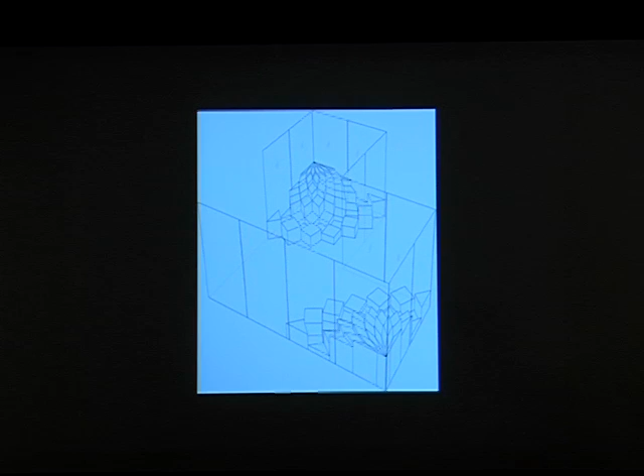We thought that an interesting way to do that would be to work in a radial pattern, because obviously that focuses on each individual piece. So within the setting that we were given, that odd L shape, we realized immediately that we'd have to do something to capture space beyond what we were given because it was kind of a disappointing footprint. So we immediately moved to mirroring and working with the radial pattern that we came up with to create virtual spaces.

And so by mirroring all the walls and bringing the pattern from the floor and creating a landscape surface, we were able to capture, virtually, miles and miles. And you can see that it created kind of a lounge space which sort of straddled the gray area between furniture and landscape. Funny picture.

This next project was never built, and it was a proposal we had for the largest tower in the world. It was a radio tower that was to replace the radio antennas lost at the World Trade Center. We were actually brought in by an engineer who was approached by a developer, so it was an interesting relationship.

It immediately became apparent that when you're building at that scale, engineering and structural concerns really drive what needs to happen. We found it an interesting challenge to create a geometry that would be pure and behave in a very pure and efficient fashion, but offer something unusual, and we came up with a tripod structure that was repeating vertically and then stacked.

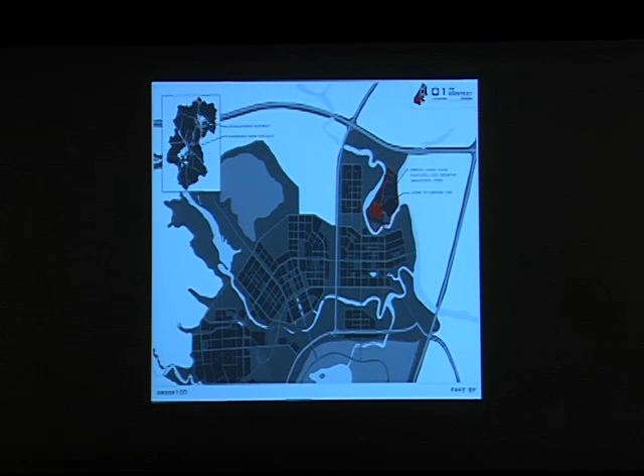So the next project we're going to talk about is Ordos 100. Herzog and de Meuron and Ai Weiwei and his company, Fake Design, invited 100 architects from around the world to each design one villa in Inner Mongolia. This is the new city of Ordos, and the site is just outside of the city—it's luxury housing on the river and reservoir there.

There's very little existing context—it was just really a desert. So in that sense, it was a very difficult challenge for us because we rely so much on context, and here the context is sort of an unknown.

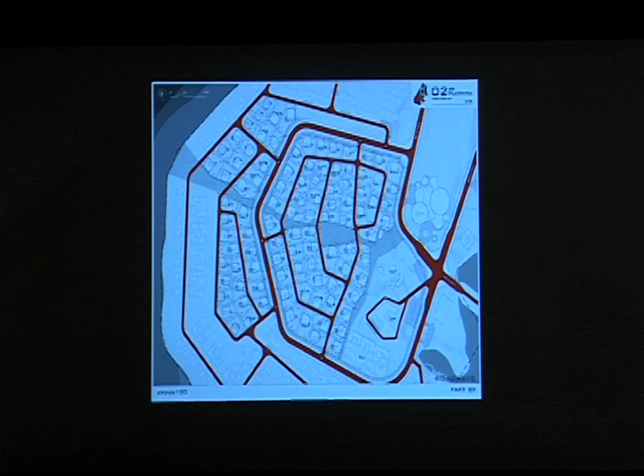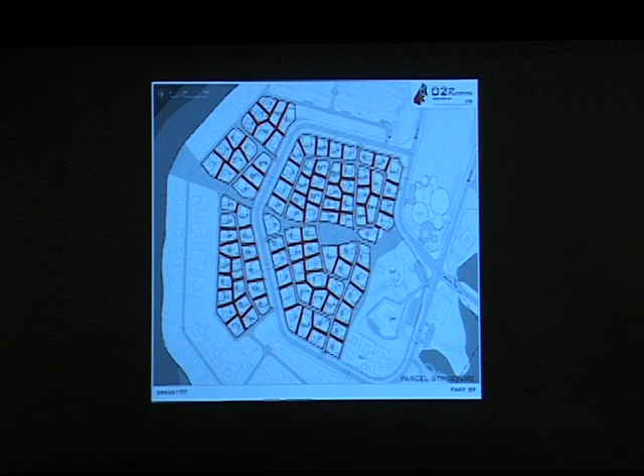We thought that was a very compelling and unusual context in which to build a house, particularly since this is our house—particularly since often housing is about creating a private sanctuary, not about being on display. So we accepted all of the contextual constraints we were given.

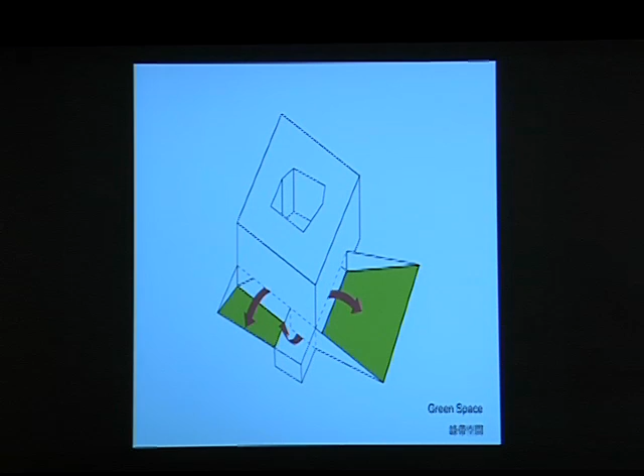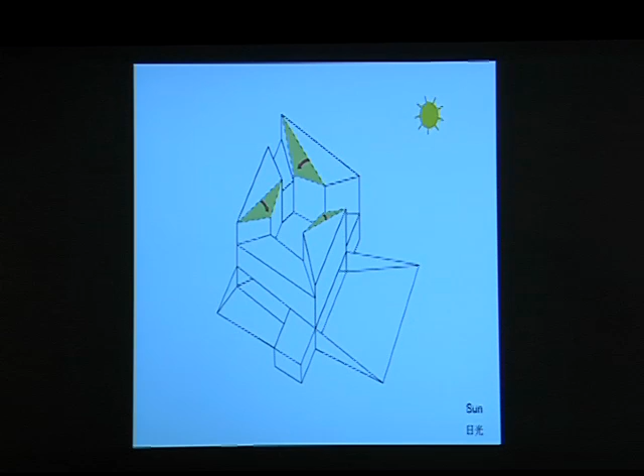We took the given volume, created a sunken courtyard in the middle, pushing the ground floor down into the ground, then cutting the landscape to provide access and direct continuation of the ground plane into the space. We also cut the top layer of the building to create views and allow sun into the courtyard. That's what generated the massing.

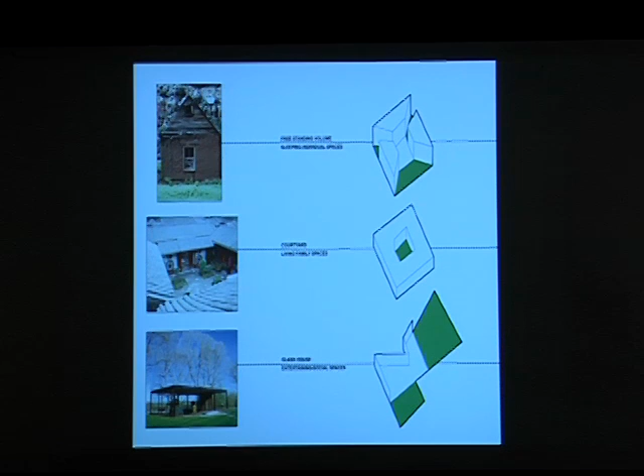The structure of each floor had quite a different character. The top, because it had been separated, created 3 pavilions with green space between them. In the middle was the courtyard, very traditional Chinese type, which we used for the main living space. On the ground floor, which had been sunk and exposed to the ground plane, you created more of a modernist building as an extension of the landscape. We thought it was interesting how you could create these 3 types stacked on top of each other.

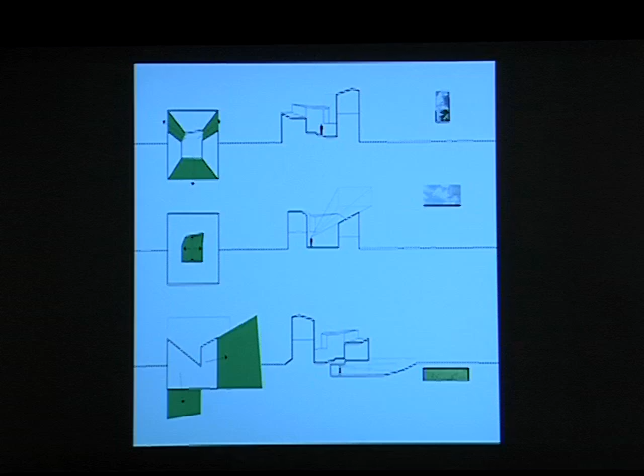The other thing we thought was important was to deal with this need for privacy in a residential space, while acknowledging that this is really a showy architectural object that is going to be viewed in the round. So we looked at strategies for landscape in the 3 zones—the public spaces, the views open out to the public, are the ones buried into the ground a little bit, so the mass of the house is pretty private in terms of views from the street.

We are always interested in this idea of view and perception, and how the object is understood as you move through space. Typically we try to create a dynamic, changing condition that has to do with scale and point of view as well.

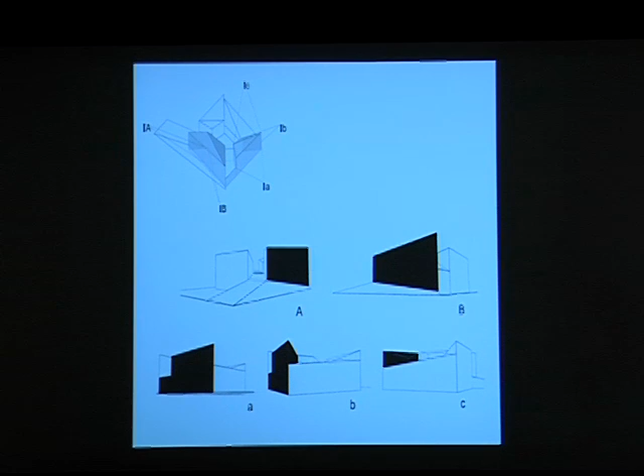In this case, the shape of the building is sort of parallelograms—none of the elevations on any side are even. So from different points of view, perspectively, it takes on very different massing or dimensional quality. A plane might look planar in one view and volumetric in another; it may take on a completely different shape from another view. This was dealing with the idea of an object viewed in the round. So this is what you see as you walk around the house.

The other given constraint—Ai Weiwei suggested that we use brick. It's the most abundantly available, inexpensive material in the area. What we thought was particularly compelling about brick in the context of China is that labor is so inexpensive there.

So the strategy is very simple. We took the brick and allowed it to take the geometry of the massing we'd already established, so that at each point a course of brick lines up with a corresponding cut in the elevation. Then you simply stack that, and because the conditions are different on every side, you end up getting multiple conditions on each face of the building through a very simple device.

This is the elevation. We also created some openings, some more diaphanous zones in the brick pattern, by opening it up a little to let light in. The overall strategy just takes the geometry from the building and carries it through, creating a series of different patterns on every elevation in a very mechanical, dumb way—but it leads to tremendous variety.

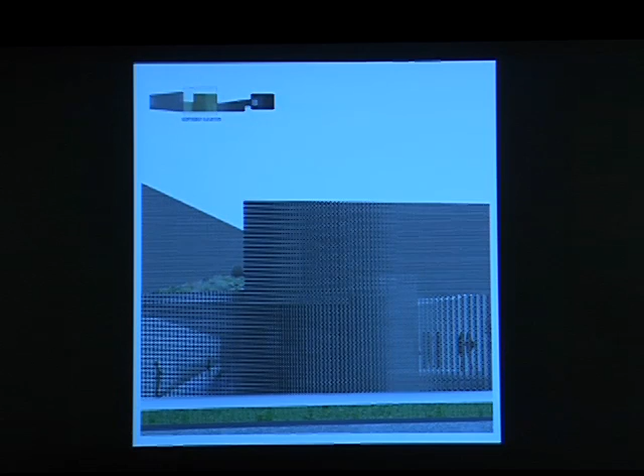This is sort of the main street view. It's the most private in a way. There's just a little bit of an acknowledgement of an interior volume on the ground floor. This is one of the spaces that goes down into the public space in the recess there. That's Ai Weiwei coming out—he likes our house.

And this is the view from the street, so you can see it is quite private. It is kind of this sculptural object.

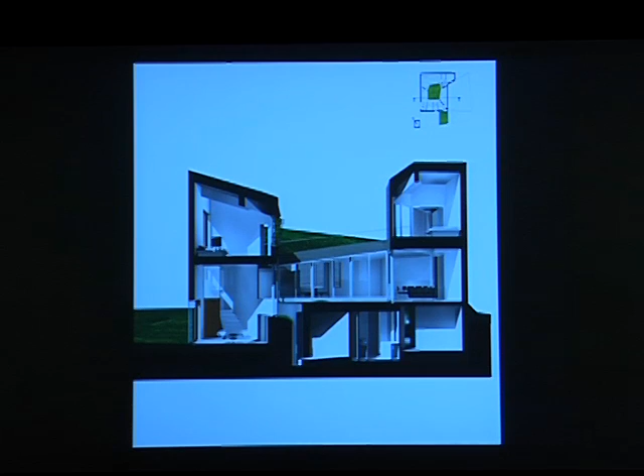In addition, because of the conditions—well, globally, but also in China—we wanted to take advantage of this kind of massing we have and the open space in the middle to really allow the center of the house to organize itself around that courtyard as a kind of landscape.

And then we also took advantage of these kind of window boxes where we planted plants between the brick screen and the interior, so that in the summer they would block the light and in the winter they would allow light in passively. Part of the program was also a swimming pool.

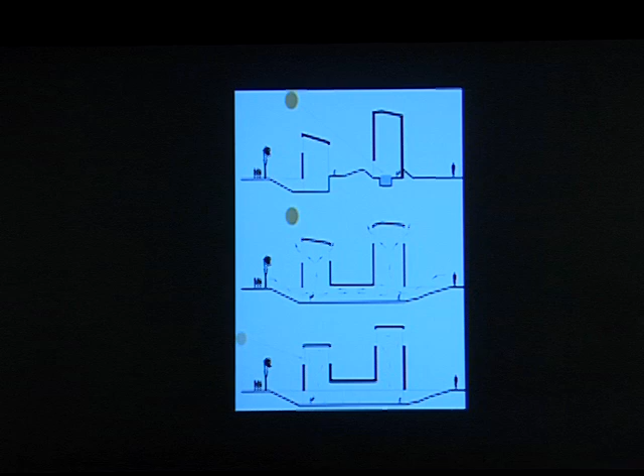We included the pool on the terrace level and took advantage of that so that again it increases the stack effect. It has a natural tendency to cool the air that's coming in, and then we have stacks at the tops of the taller volumes to let the air out.

This is just a view of the changing quality of the facade throughout the day.

Our next project is also a residential project, a little closer to home. This is in Pennsylvania, near the Delaware River. It's a really beautiful 60-acre piece of land that sits on a field adjacent to a ravine, which is very densely wooded.

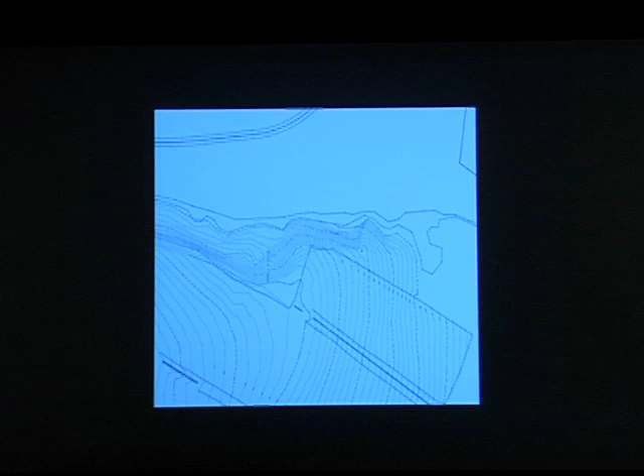So we chose the location right at the edge of that boundary condition between the field condition and the much more densely wooded ravine. We thought that was the place that had the most variety in experience, the most varied experience.

So the house is organized so that it faces each of those four conditions, so that in any particular location within the house you have a very different kind of context outside as you look out. So it's really about the views out.

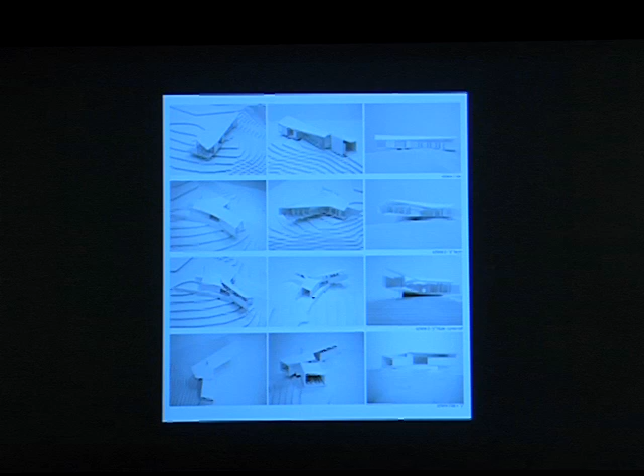And given that starting point, we looked at several ways of massing the building to exploit that kind of condition that we decided to develop. We also looked at sun studies as well. So the final massing was very simple, kind of a double bar.

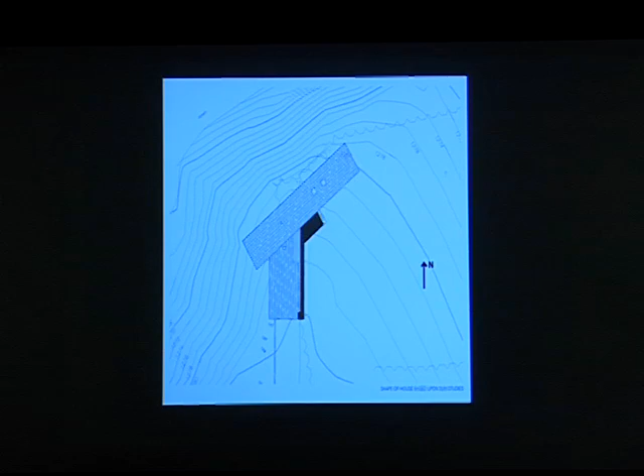The main housing bar follows the ravine and the wooded lot. Because the site is very—we wanted to really emphasize the quality of the site—one of the things that we did is we started carving out some parts of the site. We wanted to reuse the existing stone that's very common to the area.

So we kind of created a stone base, partially dug into the site and partially built up from the site. And then that wall gets extended to connect to a series of existing stone walls on the site.

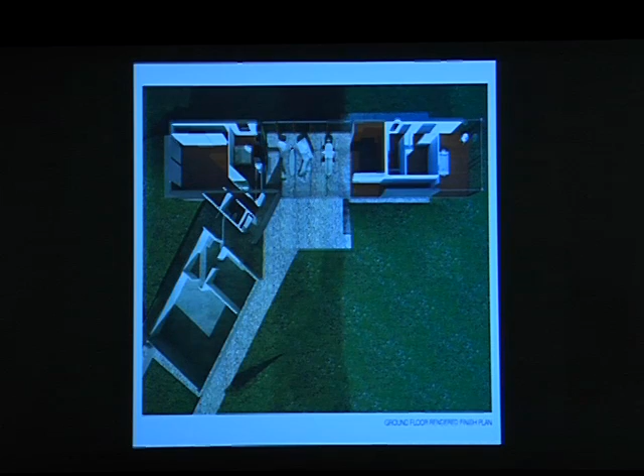And then the housing bar is really a kind of simple light frame structure that sits on top of that base. The plan is very simple: the garage is on the left, and then you have a couple of bedrooms on the two ends of the house, and the main central section is the living area.

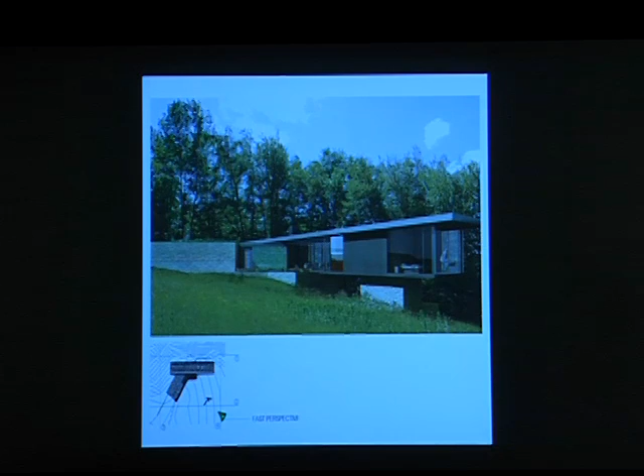The house sort of floats on top of that stone plinth so that the landscape kind of cascades beneath it. And the house also, because it's tucked away, has a minimal visual presence on the site, but you have these very dramatic views from each end of the house.

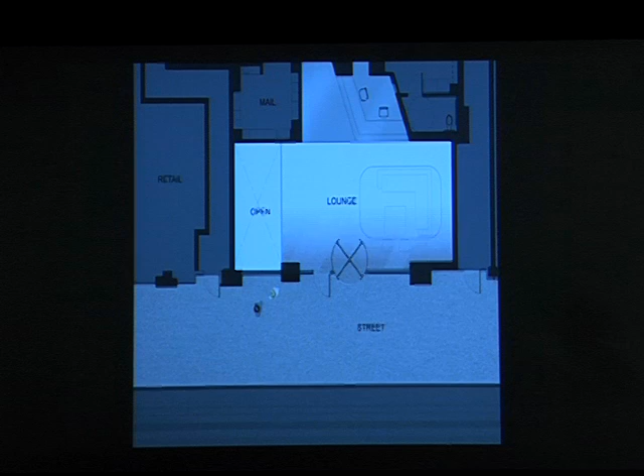This next project is in downtown Manhattan, for the public spaces of a condominium building. It has an interesting relationship with the previous project in that, whereas the previous project was focusing your view out, in this we were working very hard to bring the street and the activity in. We felt people are really moving to that neighborhood just for that neighborhood, so we wanted the public areas to feel almost like a club, like part of the street scene to the extent that we could.

The other thing we felt was very important was to bring natural light into the amenity space. They had proposed an amenity space below grade, so the first thing we did on the project was request to move it up so it was aligning with the windows. You can see there's the open space, which they very graciously agreed to.

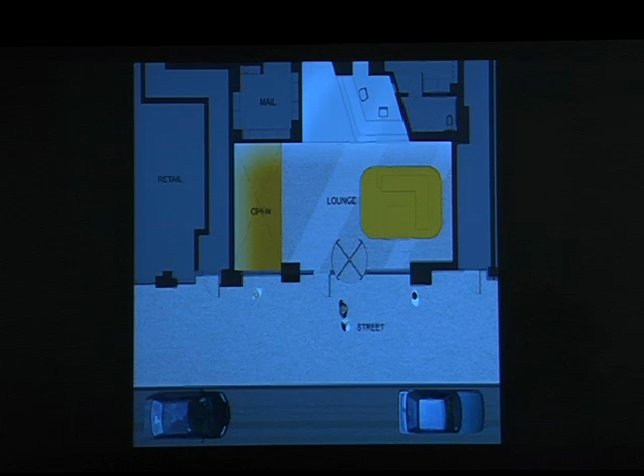Through the use of materials, we visually bring the sidewalk streetscape in and create another threshold, which is pushed back. At the uppermost part of the plan, that's where the concierge would be. We used a recycled glass terrazzo, which looks like the sidewalk—you might need to squint a little bit, but that's okay. The concierge part, mailboxes and everything would be in the back, which would feel like the part where residents would go beyond.

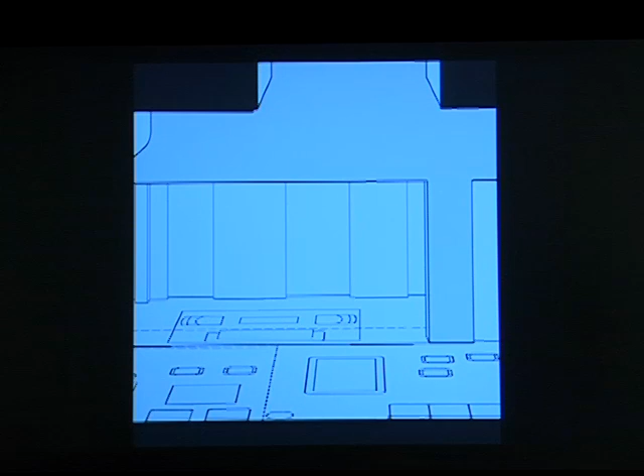But if you were sitting in the lobby, it could feel something like what you'd expect in a downtown Manhattan scene. All the materials, especially from that very solid back wall, have a kind of ambiguous quality—a mixture of aluminum and satin mirrored, back mirrored satin etched glass, all working together to create this strong threshold, which goes from the ground floor down into the lower amenity space, creating this configuration.

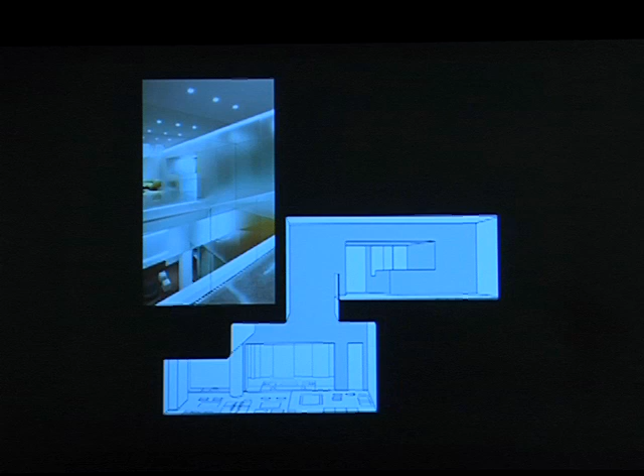That wall that was just highlighted was also mirrored, which pulls the light from the side, as you can see in this image, and doubles the space visually.

This is the view from upstairs looking down—you can look directly into the rec room that they have, which is really just for residents. The idea here was that in the daytime, when the light's coming in, you're getting natural light down in this area, and people can see down and understand what's happening in there.

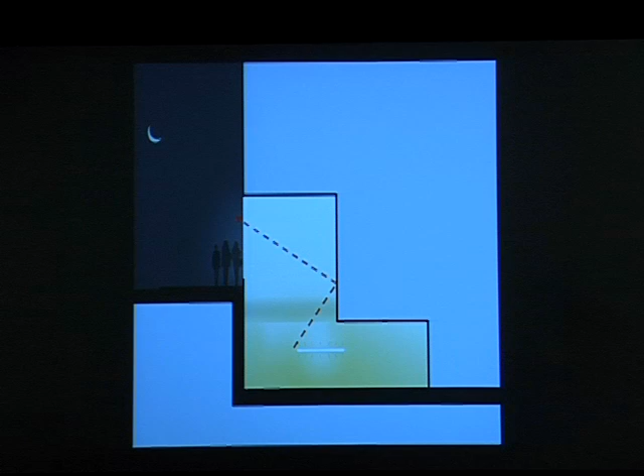But the wall is not a specular mirror, it's a diffuse reflection, so you're not actually seeing people and what's going on, but more just a sense of activity, which we felt would create sort of an intrigue from the street level. This is the view standing back and looking across.

This next project is a commercial project, and again the street life of New York was very important here—it was an important part of the context. The client was Flight Club. If you Google them, they come up as one of the top 10 cool sneaker stores in the world. Their original store was a very small storefront on Greene Street.

You kind of had to know about them to know where they were. It was not a big street, Greene Street, just off of NYU. What they were trying to do is create a new flagship store, but they didn't want to lose that kind of underground, cool vibe. They were very concerned about creating a large store on Broadway and losing their original qualities.

What we thought was really nice about the space is that it was a really beautiful open space right on Broadway. What we did is rip out as much of the facade as we could and create just a very large doorway, so you literally feel like the space is an extension of the street. The doors are these big pivoting doors, and the handle is just basketball leather and rubber, which recalls the basketball—an important component in their iconography.

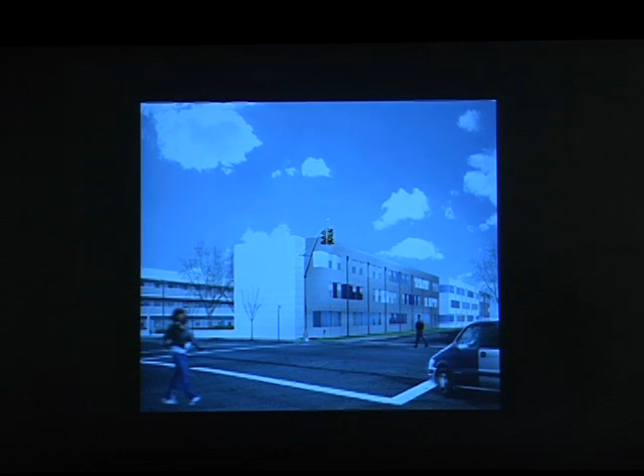And the whole thing will be reclad in metal wrapped insulated panels. As I said, the moves that we had were fairly limited, but the opportunity is enormous. So in a way, it's very close to our heart, even though it looks very simple from the outside. And we couldn't find an existing picture, but it's actually all taupe now.

So if you can imagine that, it has a very different configuration. So this will be a lot better. It's supposed to come back online at the end of the year, which is really exciting. Here's the view from the other side.

On the interior, we again used color, manipulating the door rhythm, and then really lightened up the railings. We tried to make them as light as possible so that there was more visual connection between neighbors to really create more of a community feel.

Now this next project is in...

Oh, we did get a Design Excellence Award from Michael Bloomberg in recognition of the fact that the change from what is there to what was proposed was enormous.

This next project is entirely speculative, and we entered the Electrolux kitchen design competition in 2010. The charge there is to create the kitchen of the future, and we thought that it would be an interesting challenge to work on something absolutely so small and just purely future-looking.

The requirement is to work with Electrolux appliances, which of course are the heart of the kitchen. And then the thing that was intriguing to us is that obviously the kitchen should really be all about food, and this relationship between food being processed in the kitchen and then consumed. We thought this was absolutely the crux of the whole experience there.

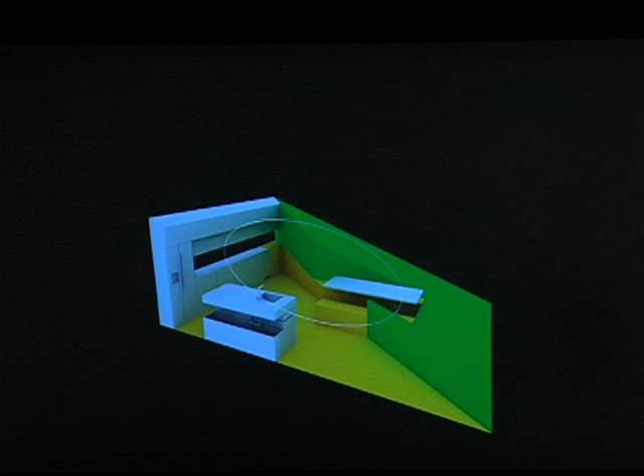But it's really only half of the cycle if you think about it, because the food is created someplace else and brought in. So we thought it would be really interesting if you could have some of the creation part and bring the whole cycle into the kitchen. So we proposed a kitchen which was kind of like grow and cook, bringing the entire experience into the house.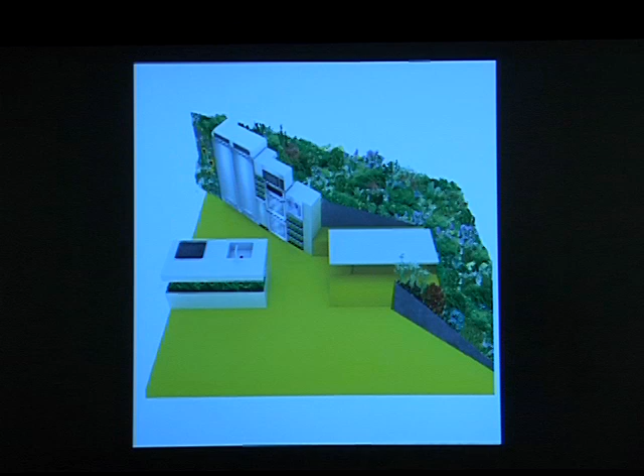So with a combination of the off-the-shelf Electrolux appliances, which were required, and agricultural pieces like grow drawers and irrigation trenches that you can see below the sink here, we created a kitchen machine, kind of, where you could produce and consume your meal in a fashionable setting, we felt, and it would round out the cycle in a way that we felt was healthy.

The other thing we did was we had ideas for using the exhaust heat from the back of the refrigerator, for example, to warm the plants or herbs that might need a different kind of environment. And the gray water from the sink would irrigate the plants that you see in the foreground here. We liked the sort of relationship with Déjeuner sur l'herbe.

It was just fun. We did win second place, which was great, and we got a whole kitchen.

Which was actually the reason that we entered, on a personal note. We were buying an apartment at the same time, so it was all a very happy confluence of events.

I can't make it go ahead. It's just slow, I think you just have to wait.

Our kitchen doesn't look anything like that, though.

So, as architects in New York, we end up doing a lot of interior renovations as well. You're looking at lofts and apartments and just trying to figure out different ways of living in these spaces, sometimes under very constrained conditions.

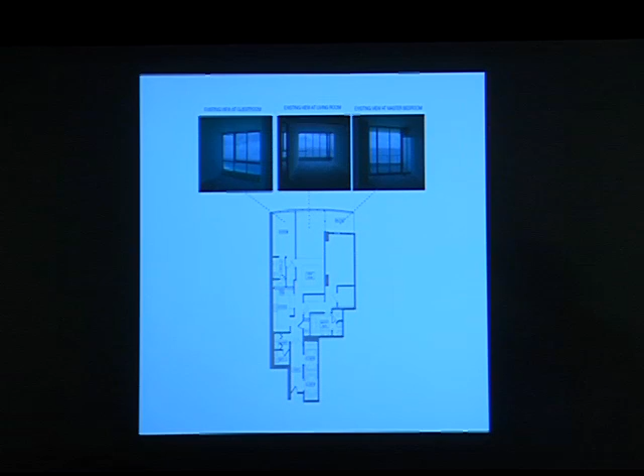This was a very wealthy client who we had done some work for, and he hired us to build out his small apartment in Miami. It overlooked the water. It was a developer apartment, sort of like 2 bedrooms and a living room. Each room had a kind of window out onto the ocean, but it felt just really what you would expect from a developer project anywhere.

So what we wanted to do was really open up the apartment so that it emphasized the fact that you were on the water, that you have this amazing view of the ocean, and that you're right on the ocean. So we reconfigured the entire space so that all of the windows are visible from all of the rooms in the apartment.

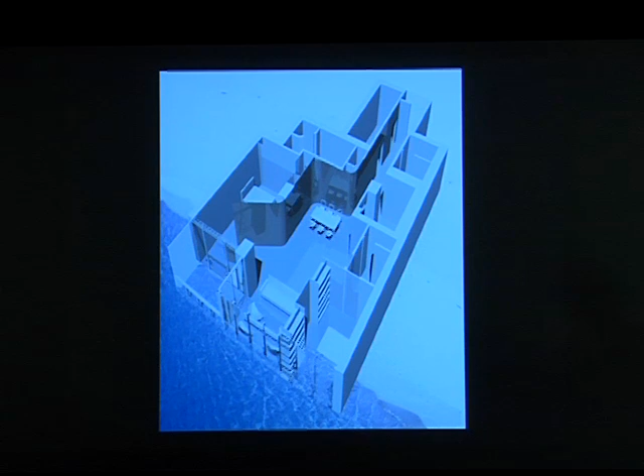The way we did that is we took the bedroom, which was originally on the left side of the space, and kind of demolished that wall, but created a moving wall which could create the bedroom when you need it, but disappear when you didn't. You can kind of see that in the 3 photos.

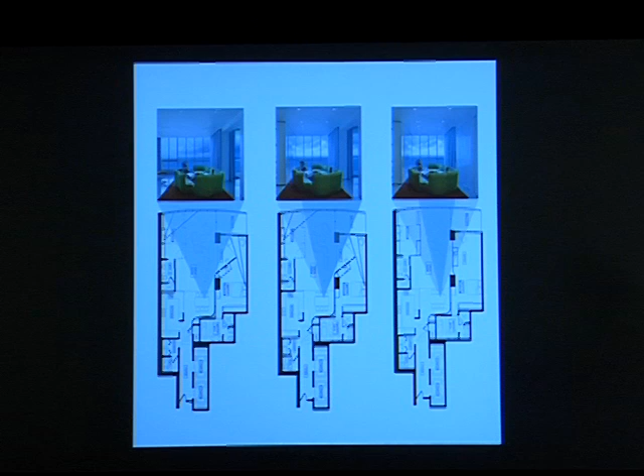And then on the right side, we moved the entrance into the master bedroom also to the window, so that when you have it open, as in the first 2 pictures, you can see those windows as well. And so this is a view of the whole apartment in the open condition.

When you need that bedroom, that unit is about a 2,000-pound unit, and it's hung from the ceiling. You can see that little crank on the end of it. You just turn that, and it kind of glides along on the ceiling. When it opens up, there's a Murphy bed that's sitting on the wall, and it plops down. The unit itself has sort of the dresser and a closet built into it, and it also has the door, which then closes against the existing bathroom volume.

So they were able to get a bedroom for their mother-in-law when they needed it, but most of the time they don't really need it.

Then on that other wall, what we did is, I mentioned before we wanted to open up the entrance to the master bedroom so that it was at the window. And really to draw people through, we treated that whole wall as a continuous ribbon from the entrance all the way out to the window. The opening at the bedroom really looks like the wall sort of extending into the room, but it can be closed off.

Part of what we got to do in this project, which we don't always get to do, is design the furniture. So this is the bed that we designed and a table that we designed. And for both of these, we used Rhino to model it, and we had it custom fabricated.

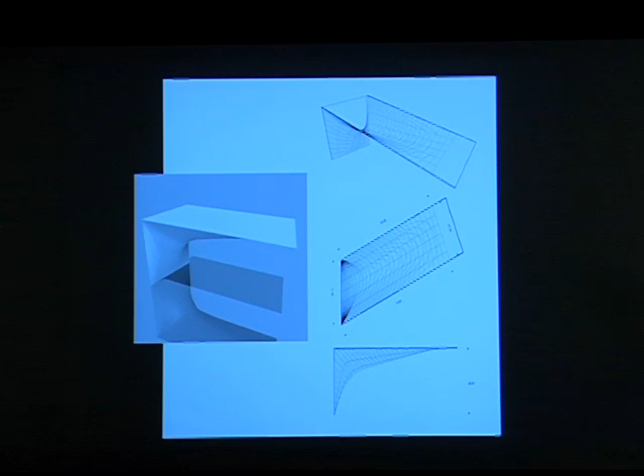The table was made out of foam and fiberglass, so it's also referred to as surfboard technology. Dan is a surfer. It's on the beach. It seemed kind of appropriate to do that.

To sort of further accentuate this idea that the interior of the space is continuous with the ocean, the floor has this kind of sandy blue resin, which is a continuous surface, and it's reflective. So when you're looking out from the back of the space, it almost looks like it's just water and extends out into the ocean, because it's high up enough that you don't actually see the beach. So you see the floor and then the ocean, and depending on the light, it can be really dramatic.

The Coney Island Aquarium, or the New York Aquarium on Coney Island, is an existing aquarium. It is on the boardwalk, but there's no opening that would let you see the ocean or the boardwalk or the beach when you're inside the aquarium, which we thought was kind of a travesty. The existing interaction between the boardwalk and the aquarium is this decorative concrete wall.

We didn't want the new building to be a sort of object. We wanted it to be much more sponge-like so that it could interact with the boardwalk, and we wanted the structure itself to be like a reef, so that you have different ecologies within the building and on either side, but they're allowed to flow in between each other and have a dialogue while still maintaining different kinds of conditions on the interior and exterior.

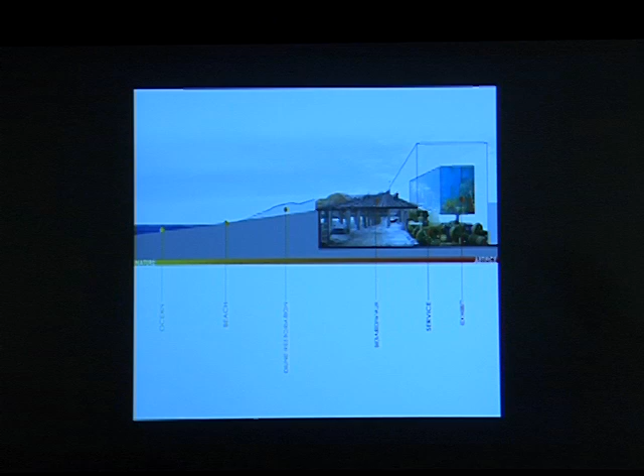It also played with this idea of artifice and nature. An observation we had is that when you're there, the ocean is possibly the most natural condition we have on the planet. Then you go to the beach, which is actually a restored beach, it wasn't originally a beach. Then you go to the boardwalk, which is clearly a man-made intervention. And then you have the exhibit, which replicates that natural condition but in a highly artificial way. It's this little ecosystem floating in a man-made box sustained by machinery.

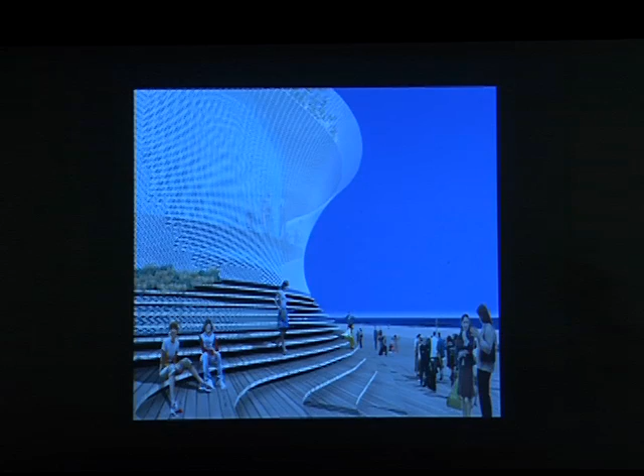So in order to emphasize that natural condition, we treated the boardwalk as a kind of landscape that went from dune to boardwalk to artificial dune onto the building, creating a space and topography that you could occupy.

Part of the charge from the Economic Development Corporation is that this building become an iconic element at the end of the boardwalk, with the parachute jump on the other end. So the idea is that the boardwalk ends down here, and people would come down, sit on the boardwalk, watch performers ideally, people traveling down, and then head back up toward the other side.

In Delirious New York, Rem Koolhaas speculated that the Coney Island amusement parks were sort of speculations on the city, kind of fantasy versions of New York City, or the potentiality of the city. And we thought that our little intervention could be a fantasy beach in a way, as a kind of counterpoint to that.

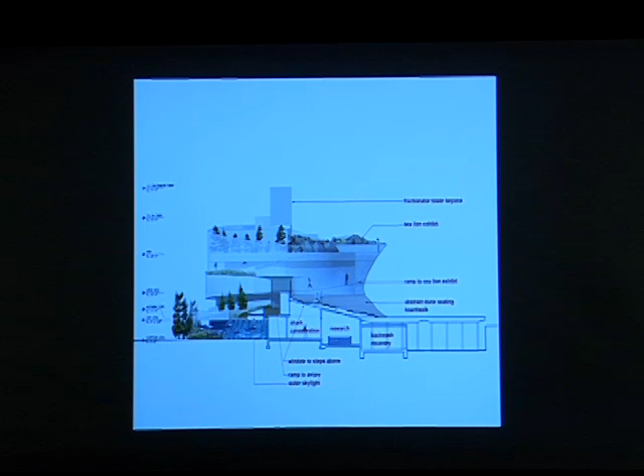Viewed aerially, it's a disruption or a melting of the boardwalk condition on both sides. And in section, the aquarium is down below the boardwalk, but it creates the possibility of bringing people up so they can look into the aquarium. And because we imagined that the steps would be open in some areas, you could also look through the platform out into the boardwalk.

We also had some exhibits which would come down to the boardwalk. So that oval opening you see there is actually a sea lion exhibit, which is on the roof of the building on the right, and they would have a diving tank so that you could see from the boardwalk the animals diving down into the space.

The cafe for the aquarium was also located on the right side, and you could have this interaction between the boardwalk and the cafe. We also proposed that maybe they could even service the boardwalk, and we got a little pushback from the aquarium on that, but we thought that kind of interaction would be appropriate.

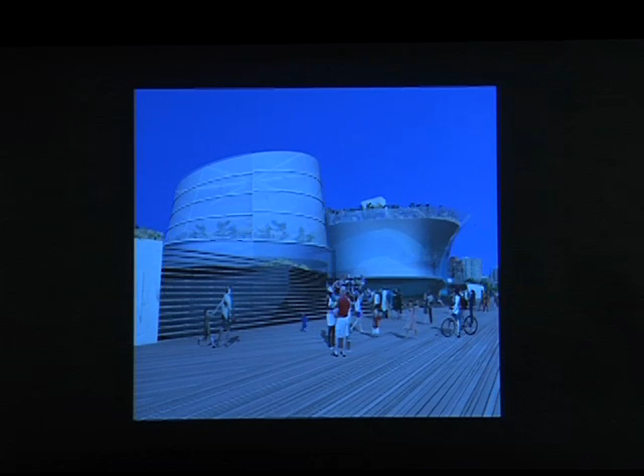In the skin, what we tried to do is use a sort of mesh, and the idea was that it had this volumetric, sculptural quality, but it also allows you to see the activity behind it. Because it was a double screen mesh, you would get a kind of moire effect, almost like schooling fish, animated in a passive, natural way.

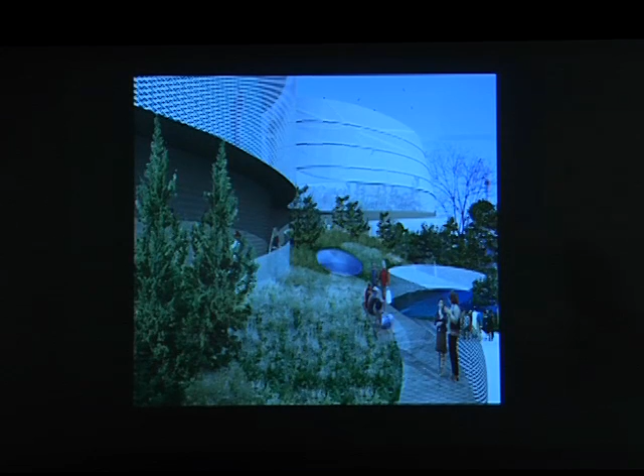The top of the main shark building also allows you to view all the way down the boardwalk. On the aquarium side, we really treated it as a landscape element. The interior of the aquarium has very little green space, it's all black pavement, literally asphalt. So what we wanted to do is take advantage of the big roof area to create a bit of green space on that side, framed by that very scripted path sequence in.

At night, and this was part of the charge for the project, this thing had to be illuminated to become a beacon at the other end of the boardwalk, in the same way that they've spent a lot of money illuminating the parachute jump at the other end. This project has gone through several iterations and is now kind of dead.

We felt there was so much more we could do, and this fortuitous environment that this closet was in is that it's surrounded on all four sides by corridor. So we immediately asked the school headmistress if it would be possible to grab the corridor, and then we set our sights a little higher and actually asked about the staff room. The teachers and the headmistress were delighted, they wanted to do anything they could.

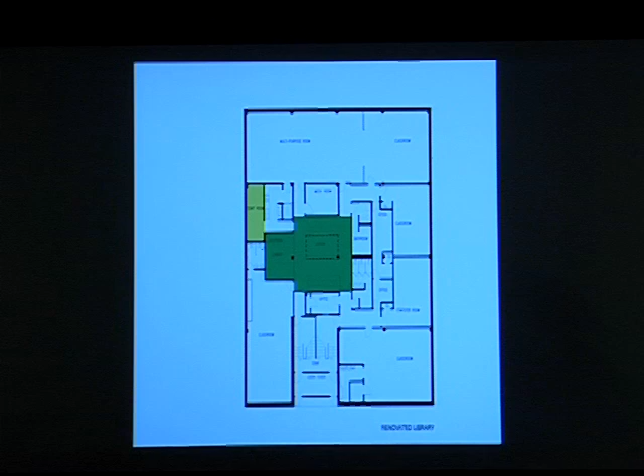So instead of giving them a library, we created like a library hub. We incorporated the entire area into being a reading, gathering space surrounded by books, but the students are passing through there to get to all their other functions. It was very, very simple, massive use of plywood here, a little bit of raked seating.

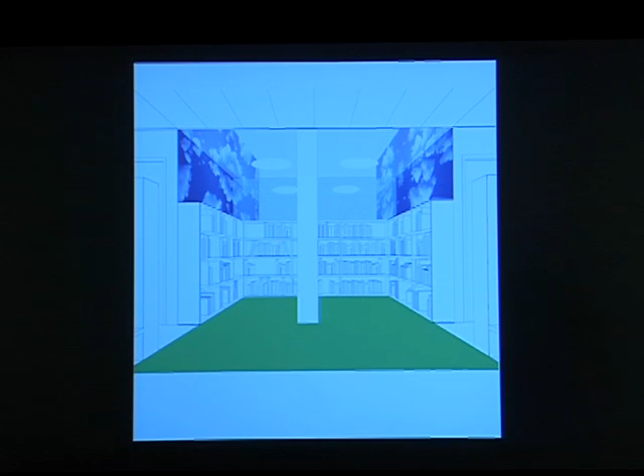The other challenge for the space is that it is entirely underground, and we wanted to do something to enliven it. So we put a mirror on the back wall, a cloud mural on the sides, and a reflective new matte ceiling across the top. So the visuals you get are much better than you might expect.

So both of those projects, you see how we're always trying to meet the program requirements, but we also, if the opportunity arises, want to give more. Obviously, that's what we're brought in for. I mean, anyone could fill in the library, I guess. But these three projects show how we have taken the program and then created either a public space or at least a community space where potentially there was none. It's sort of a byproduct of the main design, but it ends up defining the project.

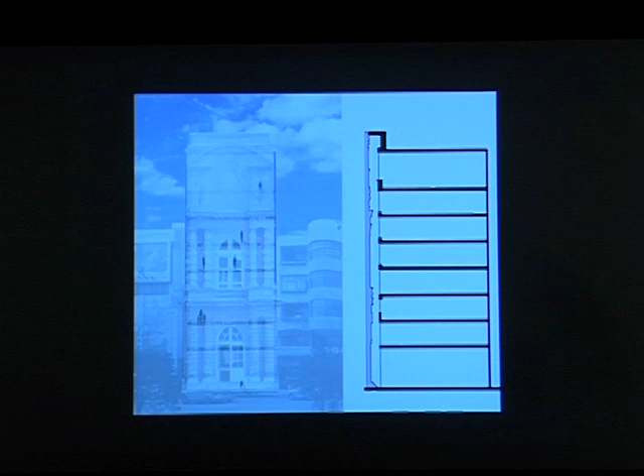When we heard about their brief, one of the first ideas we had was that we were not going to recreate, in a pastiche fashion, some French fashion house in Shanghai. We thought it might be interesting and playful to do something with a facade that had a dual nature, with an interior face and an exterior face, whereby the exterior face was straight, sleek, modern, which is also very preferential for durability, wear, and pollution in an environment that has pollution. And then the interior could be this kind of relief, and we thought cast glass might be interesting.

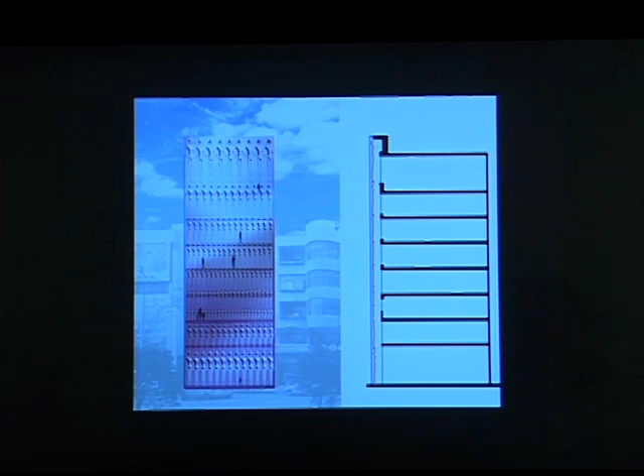We also thought this use of a two-sided facade could bring the idea of mass production into it, because obviously every Barbie doll is mass produced and comes encased in plastic, in several layers of plastic. So our first concept model, which we showed them, was this: a two-layered facade, where the interior is literally the Barbie packaging, with the exterior being a proposed storefront.

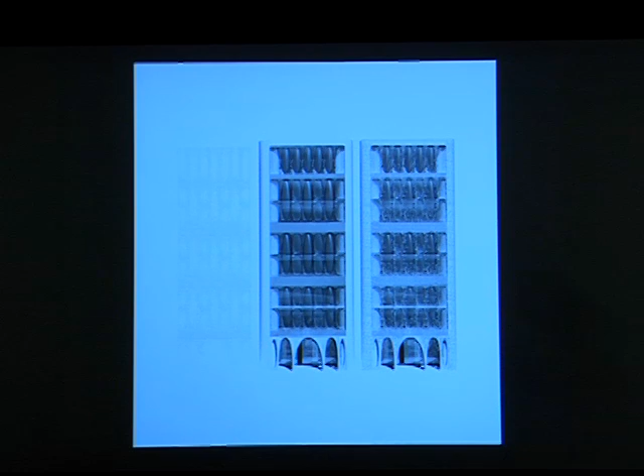It was a little too much, so we had to push it in a more architectural sense, because they thought it would be kind of freaky if you're walking by seeing giant legs formed out of molded polycarbonate—but it could have been cool. The direction we moved in was to use the two-layered polycarbonate storefront system, but make it a more architectural expression.

We also tried to make the interior spaces, the interior relief pattern, a little bit ambiguous, so that at one scale it could look like lockets or picture frames, and at another it could look like an Art Nouveau window. We collaborated with Ogilvy and Mather on the development of this frit pattern, which goes on the exterior facade. From a distance, it recalls climbing vines, and when you look close up, you can see the entire frit is made up of little brand pieces—icons like clouds, stilettos, and purses.

Because the project was in China, we had so many opportunities to do custom pieces that were very unusual. It was a very satisfying design experience—we were able to take the design all the way from the top level down to the most custom little pieces and touch points, including the dishes at the restaurant, for example.

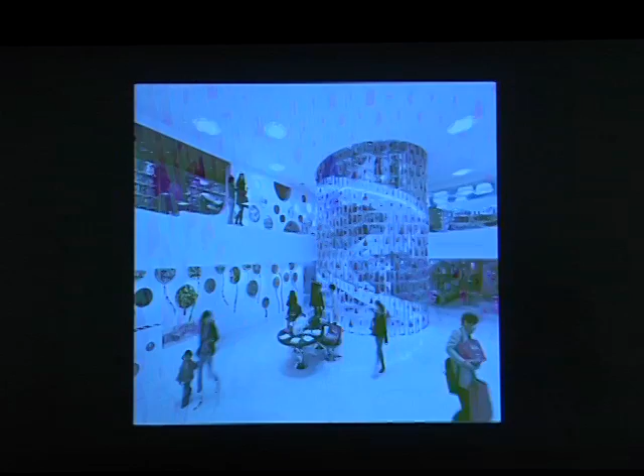This is the view as you come into the main space. It was very important to us to create different environments for the different types of products, but keep the space as open as possible. So we had the challenge of creating distinct areas that are also open.

We had the opportunity to do all of the fixtures and custom rugs, even custom tile patterns. It was an amazing experience to have this total design authorship. It wasn't—I was about to say control, but it's very difficult to control because it's all getting built in China. So there are real challenges, but we certainly had the opportunity to design everything and, as much as we could, control the manifestation of it.

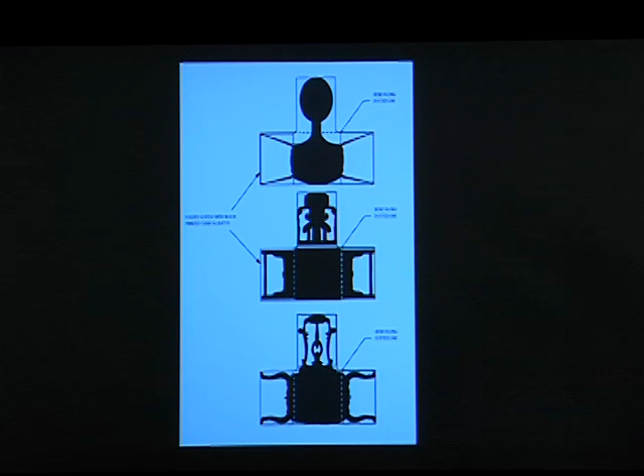We made chairs for the cafe. Again, they're folded acrylic, and here we tried to show this kind of universal appeal of Barbie with a Western antique, an Asian antique, and a contemporary chair, all printed on the acrylic and folded. We thought this was appropriate because it's this play on faux and real and mass production.

One thing we should say about those photographs is Iwan, who just finished his show here, shot 99% of those images for us. He's fantastic. When Hayes was showing you the street elevation, he said it's a very narrow street, but it looks like you've got the world. That's what Iwan can do.

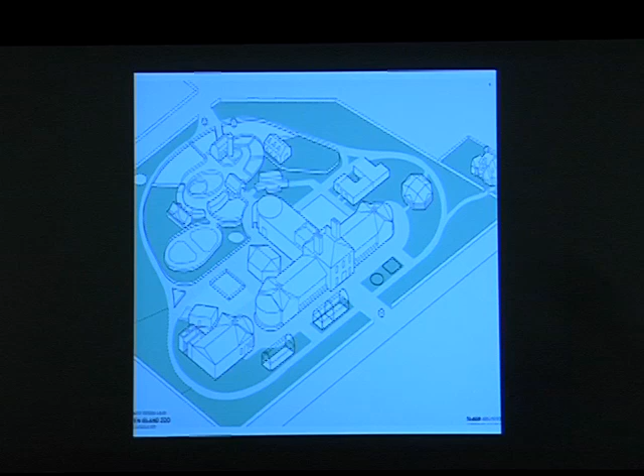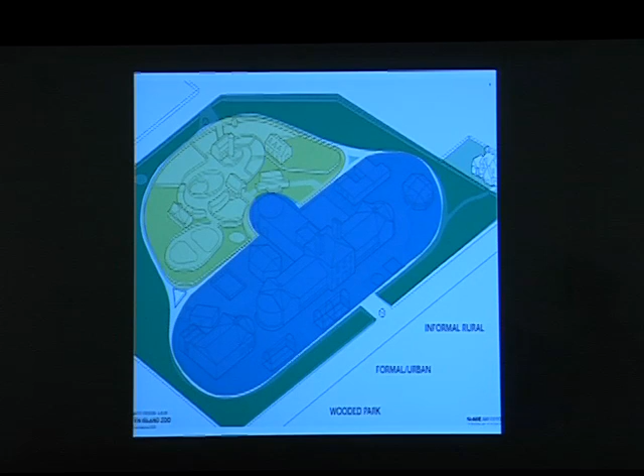This project is the last project, and it's another project for the DDC. It's a project for the Staten Island Zoo in Staten Island, located within an existing park under the New York City Parks and Recreation Department. Our charge was with the existing zoo, a very small zoo. It has a formal zoo building in front, and an informal children's zoo in the back. It's really like a front yard, backyard kind of situation. The whole site is surrounded by a really beautiful, dense park of trees, so we wanted to keep those conditions.

Now the main objective had a couple of parts. One was to create a new children's zoo. The other was to create a new entrance on this side of the zoo, because the formal side faces Broadway, but there's no parking there. Everybody comes to the zoo from this side and uses this service door to go in, so we were charged with creating the new public entrance, which will be the main entrance.

This is kind of an existing site plan. This is our plan for the children's area. What we tried to do with the area is create two circulation paths.

First of all, we have this kind of entry building right here. They needed a building for some educational programs and for the store, so we used that as sort of the gate into the zoo. So you come through the fence there and then come between, sort of through the building into the main park.

Once you get there, you have a little plaza where school groups can gather, and you can follow the path down on the bottom of the screen, which takes you over to the main zoo, or you can go into the children's zoo, which creates a figure-8 looping circulation, perfect for small children because they can never go anywhere.

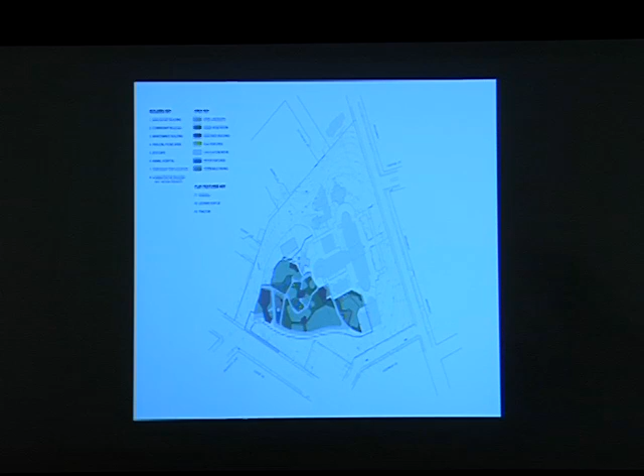One of the things we noticed is that the existing zoo has a tremendous amount of paved area, and we wanted to minimize that because it's not very efficient in terms of water management. So a lot of the paved areas we proposed were going to be more of a cobblestone type paving, which was permeable and would allow certain areas to become unoccupied in the winter. When there's snow on it, you wouldn't clear this, but there also aren't that many people, so it has a built-in kind of flexibility between summer and winter.

So this is the new permeability of the site, which is a significant improvement. All of this project, we thought, was appropriate to be very sustainable because it is about nature, so it's sort of the subject of the whole project, but it's also a requirement of the Design Excellence Program in New York City, which is a great thing.

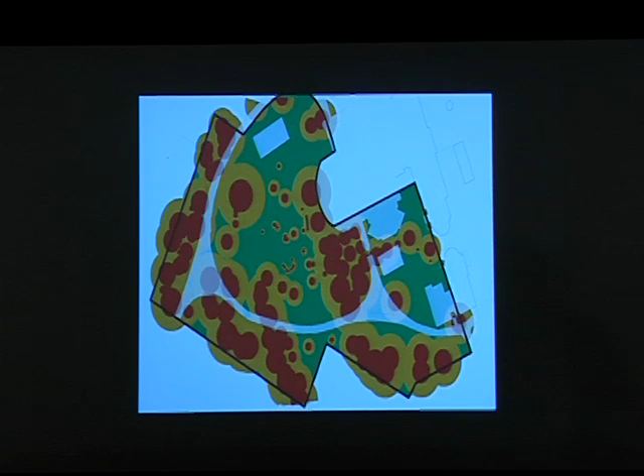The other thing, as I mentioned before, is that all of these red zones indicate tree canopies. So we were supposed to build this in the middle of a kind of unbuildable site. We had to come up with strategies for building in a way that was not invasive and would preserve the trees.

So the main entry building is here, as I mentioned before, and you come in and we created a plaza here with some rake seating so that you could gather there, have a little performance, or school groups could wait for everyone to filter through. Then you could either take this path along the bottom... I sort of lost myself here. You could take this path to go to the main zoo, or come into the petting zoo here.

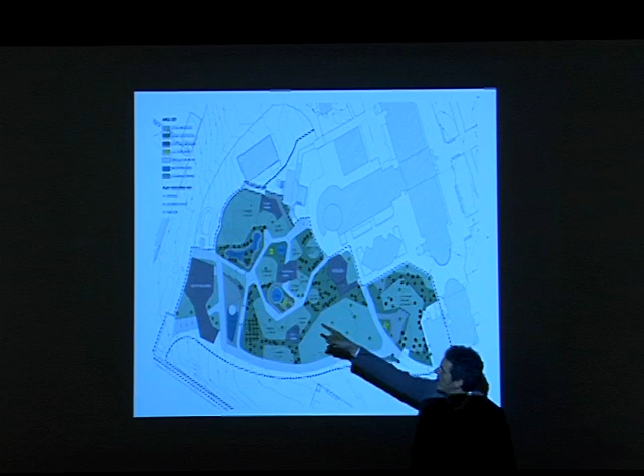And the petting zoo was organized around this idea of a farmstead. The slight topography of the landscape also allowed us to create different readings or perceptions of the space depending on which side you were approaching from.

This is kind of an overall view. You can see the entrance building. And then another thing that we did is in the main zoo...

Like I said, we wanted to create this idea of a farmstead and integrate the landscape as part of the experience as you come in. But in order to do that, we also wanted to minimize the number of sheds. Currently, the zoo has like, I don't know, 25 little sheds for each animal - the bunnies have a shed, the horses have a shed. What we wanted to do is consolidate them and organize each animal's area off of a different side of these barn structures, so we only have 3 barn structures down from like 20.

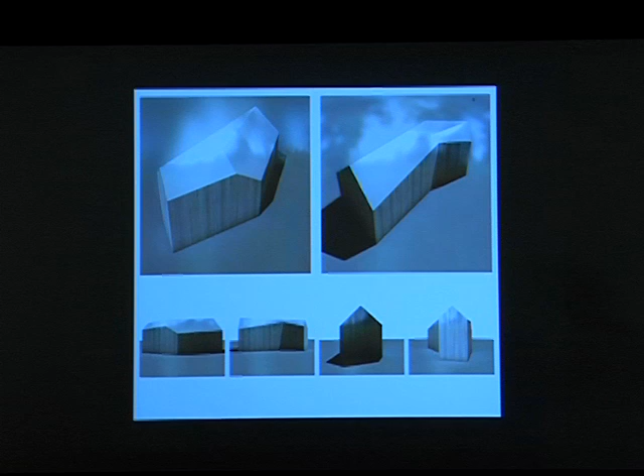Similar to the strategy we used in Ordos, the buildings are sort of vernacular, memories of vernacular architecture, but they're distorted so that from some angles they look like a long, very long, simple barn, or more of a shed. Sometimes they look like a very compact structure. So it uses perspective and the point of view to create very different readings from each side. These are also looked at in relation to the landscape, whether you're looking down on the structure or up on it from the landscape.

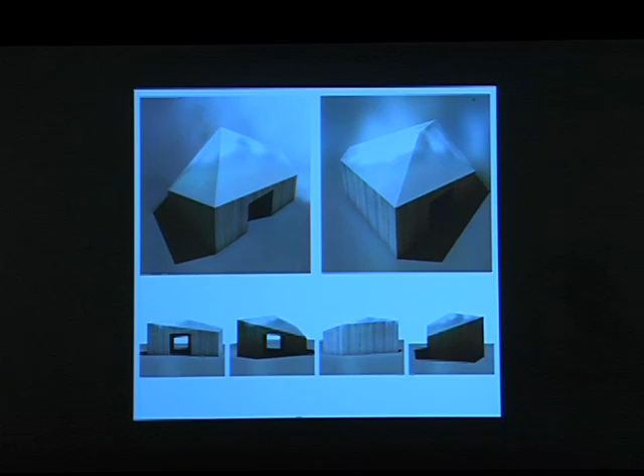The next element is this kind of entry building that we created, and as I said, it was programmed to have an educational component, a small office, and a gift shop. Again, we treated it architecturally so that it read something like in between a landscape and a shed.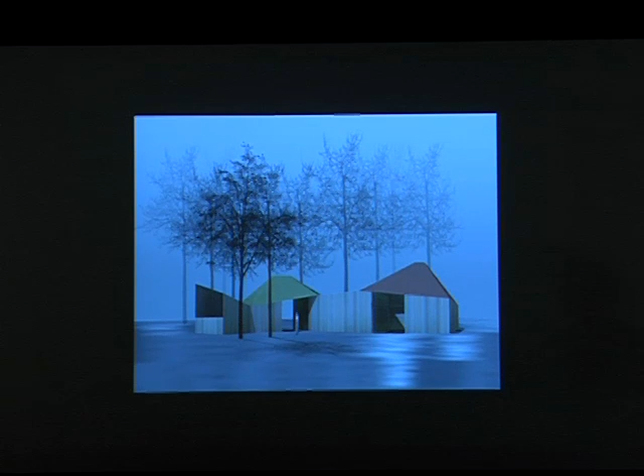So you could read it as sort of a hill or a rock outcropping, but it could also look sort of like a barn structure. So it's a very simple structure in keeping with the very informal farmstead iconography of the children's farmstead. This is just a simple plan - it's a very small building.

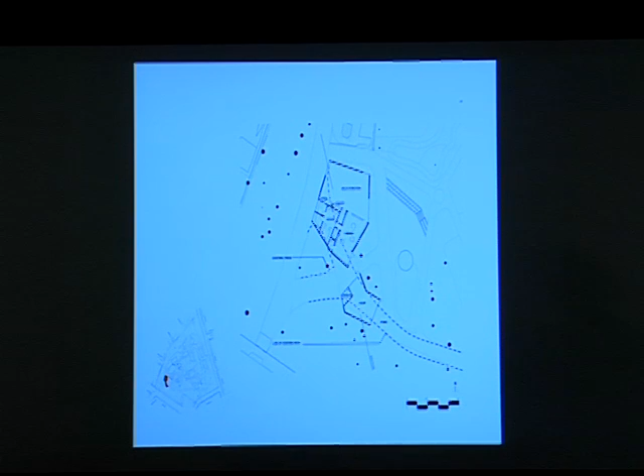It is also suspended above the ground. Again, because we need to maintain the root structure of the trees, this and the other buildings we're proposing for the site were all built up above the ground on pin foundations. So this is a view entering the building.

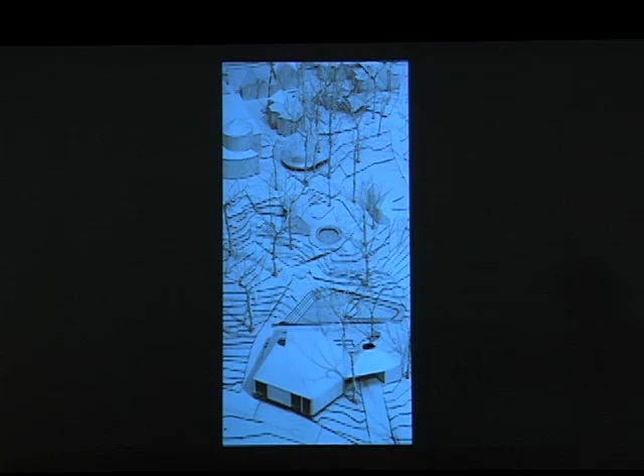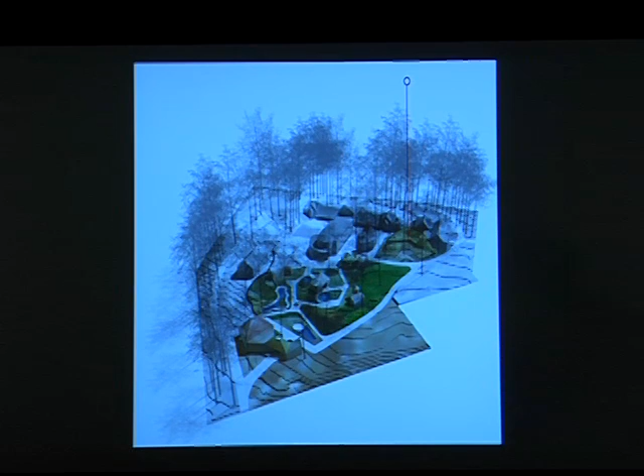You can see the different barns. And the next project, which is currently out to bid, is the leopard enclosure. It's a large exhibit for a leopard, which is currently housed inside the main building.

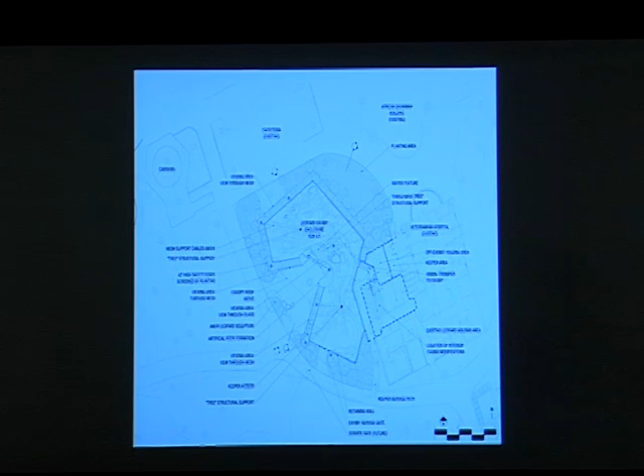These poor leopards have been there for 10 years and have never seen daylight, which is just horrible. So these guys are going to get this amazing outdoor space. We're a little concerned they won't know what to do when they have sunlight, but luckily they should be in there within a year and a half.

It's a very simple structure, basically a net structure. We use piles rather than footings so that we could minimize the impact on the trees. Some of the trees are actually part of the exhibit, with living trees going through the enclosures, providing shade in summer, and in winter, when leaves come down, allowing sun to come in. So we used the tree canopy as an architectural element, as part of the architecture of this and other parts of the building.

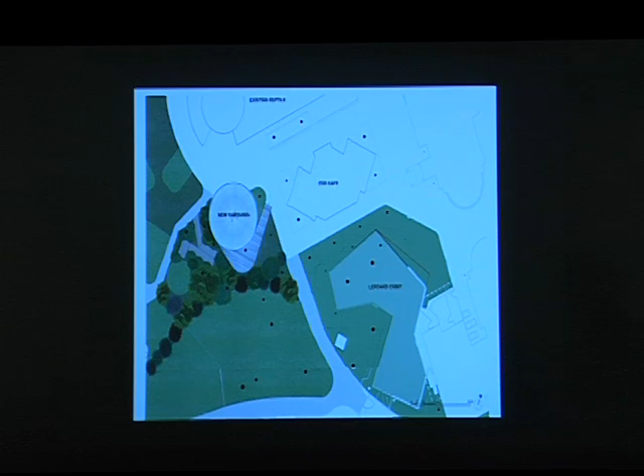The last piece we're going to show you is the carousel structure. This is a carousel they want to bring to the zoo. We located it near the main building so it concentrated these buildings in one area, and also so there could be a synergy between the cafe and the carousel—kids could wait in line for the carousel while their parents got food or went into the main building. Again, it's located right between a series of trees, so it was very difficult to locate on the site.

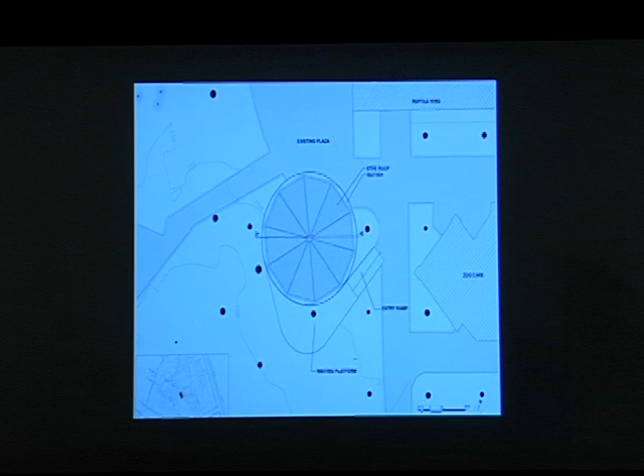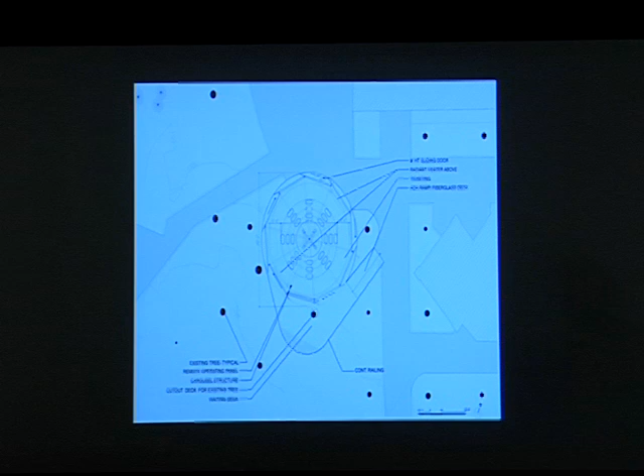We have an ETFE roof, a kind of transparent membrane roof, which is double-shelled. The main space is simply a glass enclosure around the carousel. Part of the reason we wanted the ETFE roof is to allow light into the carousel enclosure, because we visited many carousel enclosures around the city and elsewhere, and usually they have a solid roof so you can't really see the carousel from outside. This should allow you to see the carousel clearly without any artificial light.

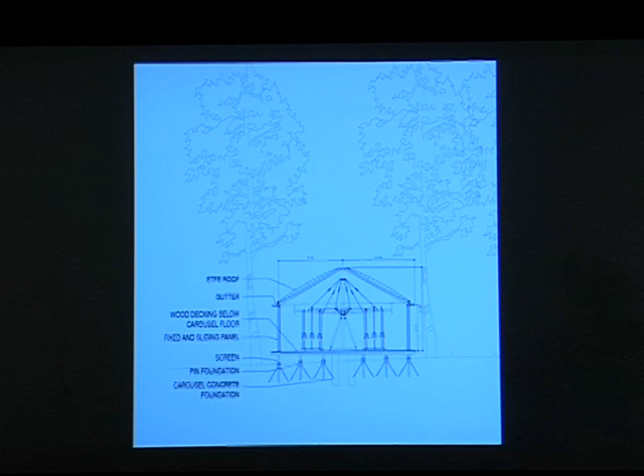As you can see, the whole thing is mounted on these pin foundations, which are kind of interesting. They're like concrete blocks, and then you drive steel pins through them, and the pins create enough surface area that it holds the structure up without having to dig or pour anything in the ground.

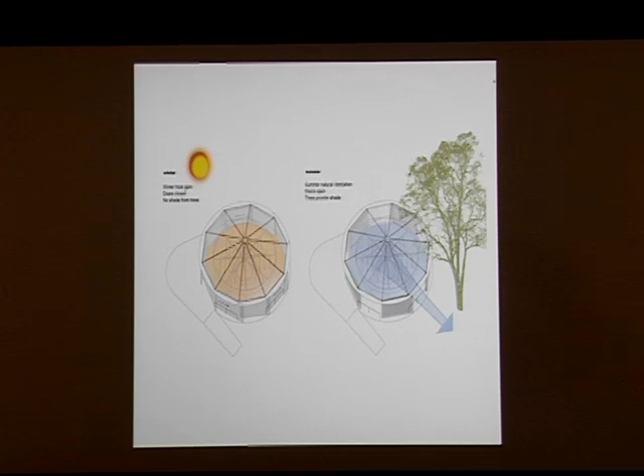Again, the roof works symbiotically with the canopy of the trees, so the transparent roof—in summertime the leaves block the sun and prevent it from heating up the carousel. In wintertime, when there are no leaves, the sun can go in and provide natural heating for the carousel, making it just a little bit warmer than the outside spaces.

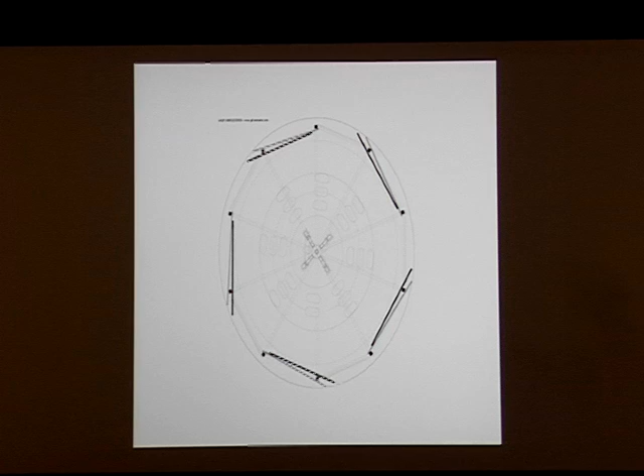All of the enclosure on the vertical surfaces are these giant glass panels, which can be slid open. In summer they would be open like this, and in winter they're shut, again capturing the heat from summer to winter. They kind of stack on top of each other so you maximize the openness. Half the panels move, half are fixed.

The last details are on the glass itself. We created this frit pattern of little animals so that kids don't run into the glass. It goes from solid animals to negative animals in a continuous gradient.

What's that? Did you say that was the most contentious? Oh yeah, that's Hayes reminding me that we spent 80% of the discussions with the zoo about the pattern. Everything else was really easy, but the animal—like, why do you have a mouse in there and not an aardvark? It's like, okay.

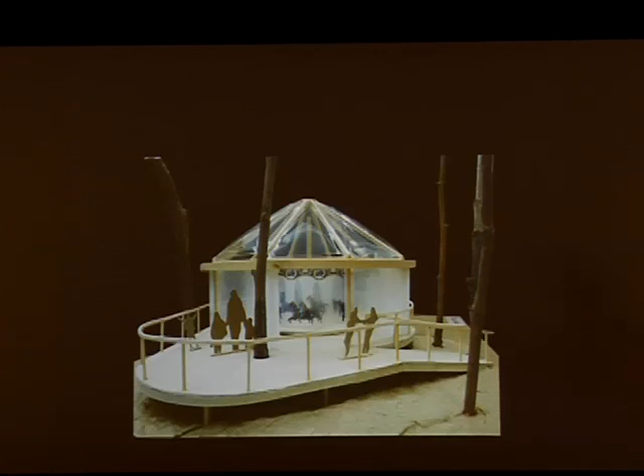You never know what the hitch is going to be in some of these projects. All right, that's it. Thank you very much.